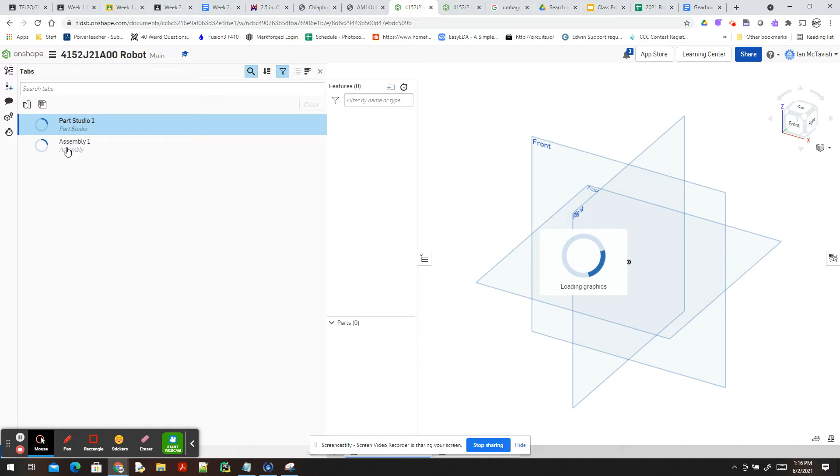So the key thing with this is we're going to bring that drivetrain in. I'll just wait for a moment. The only thing that should be in this robot file is one assembly, and that's going to be the complete robot. So I'm going to insert other documents, and there's the drivetrain. So I'm going to insert that.

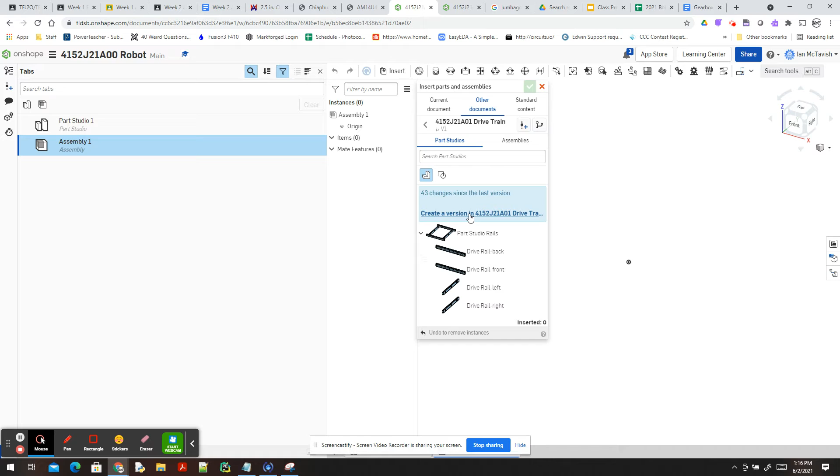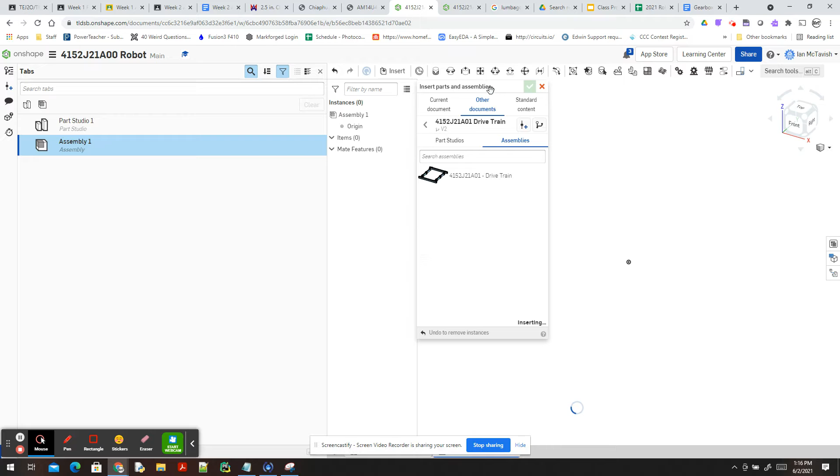And I'm going to create a version right now. We had a version before, we'll see if anybody's made any changes, but the benefit of the versioning system is that we can bring in the drivetrain, and if somebody makes a change to it, we are using this version, so we don't make any changes until we upgrade the version.

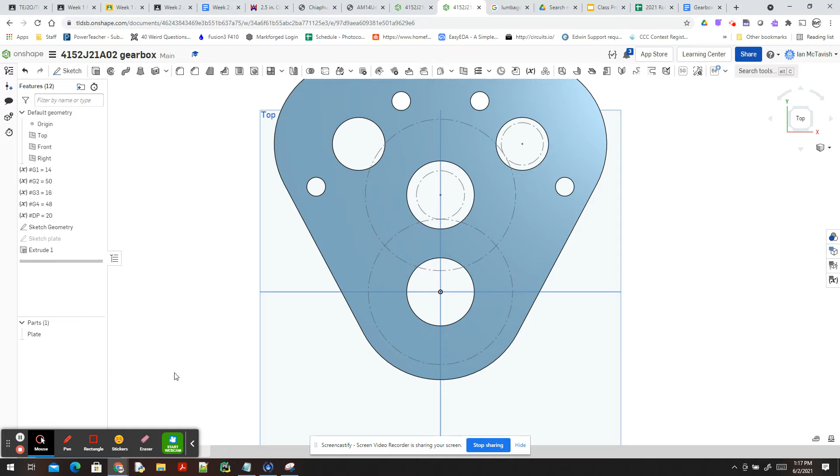So that is in position. We're good to go. I am going to fix the very first piece in here in position, so everything's locked in place. So there we go. We're ready to go. Now our gearbox, what we need to do is we need to create an assembly to begin with, and this will be our completed gearbox.

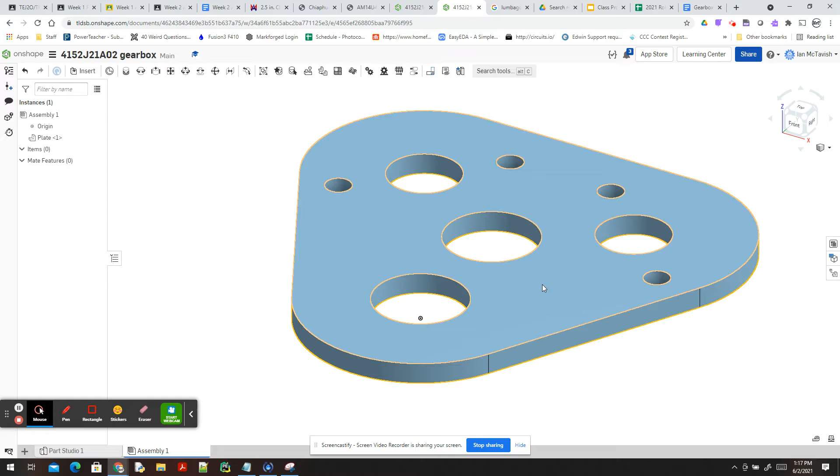Right now we only have the gearbox in there because we're going to figure out the mounting. So I'm just going to insert that. So there's the plate. And we'll just fix that in place, and we will be designing our gearbox based around this.

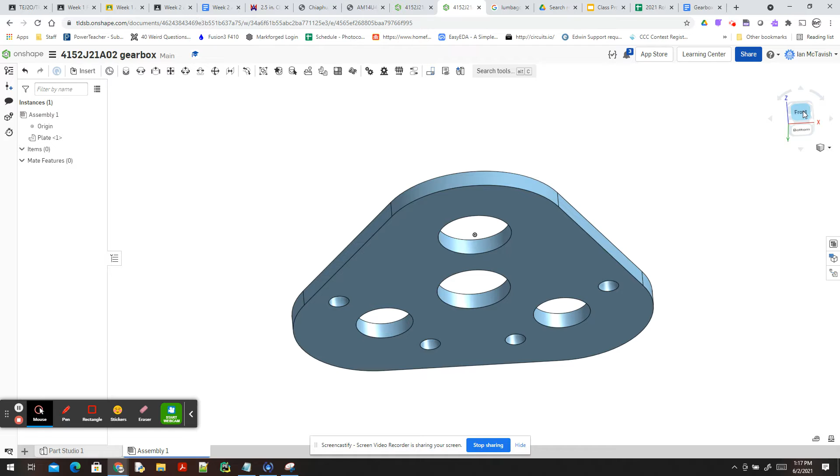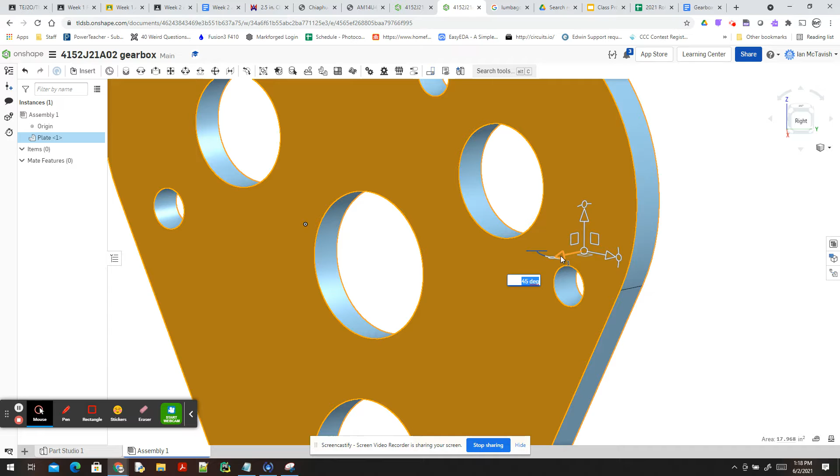Actually I'm just going to unfix it, and what I'm looking at is the bottom. Let's turn to the right. So what we'll do is we are actually going to rotate this, rotate it 90 degrees. And then let's rotate it this way, 90 degrees. Not 45, 90. And there we go. So everything's positioned.

That's great. And we'll just fix it in place there. So we're going to add our full gearbox to this, but what we'll do is we'll just create a version.

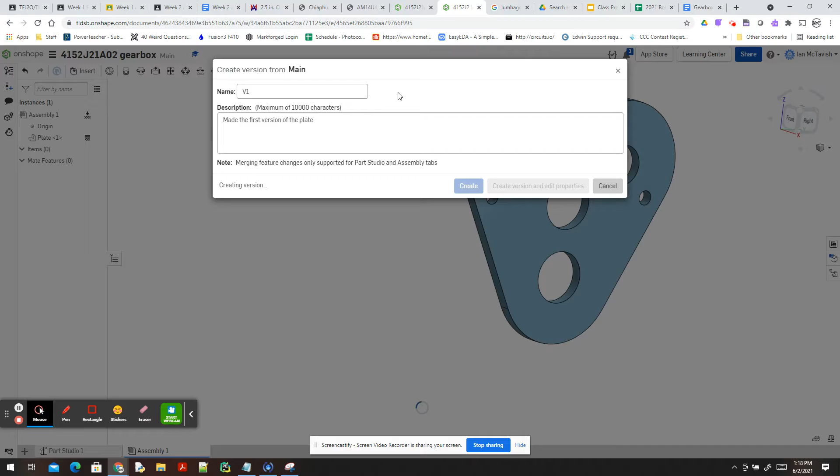I'll make the first version of the plate. We're going to create this, and there we go. So what we will do is we'll go back to here, and now we can insert that document.

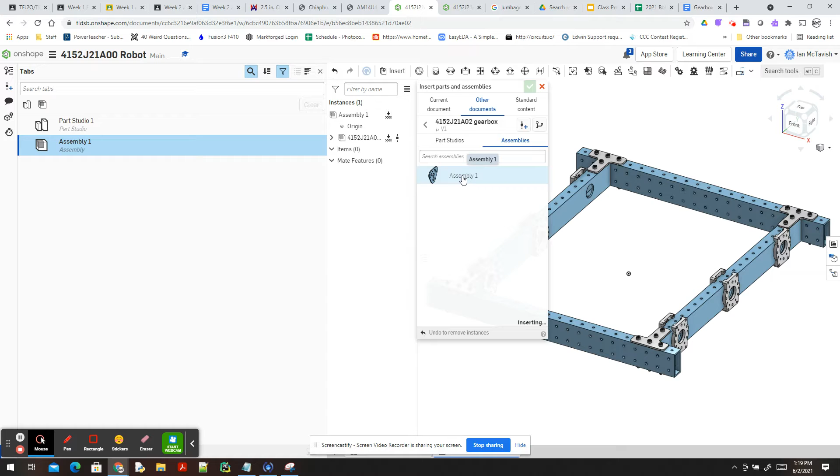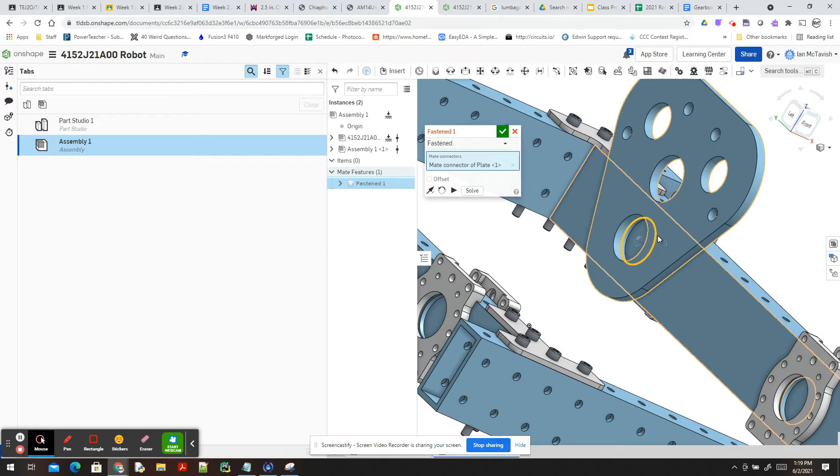And there's our gearbox, and we're going to insert the assembly. So there's our gearbox. And what we'll do here is we are going to fasten this. So we're going to pick this circle right there, and we're going to fasten it to that circle right there. And there we go, so there's our gearbox.

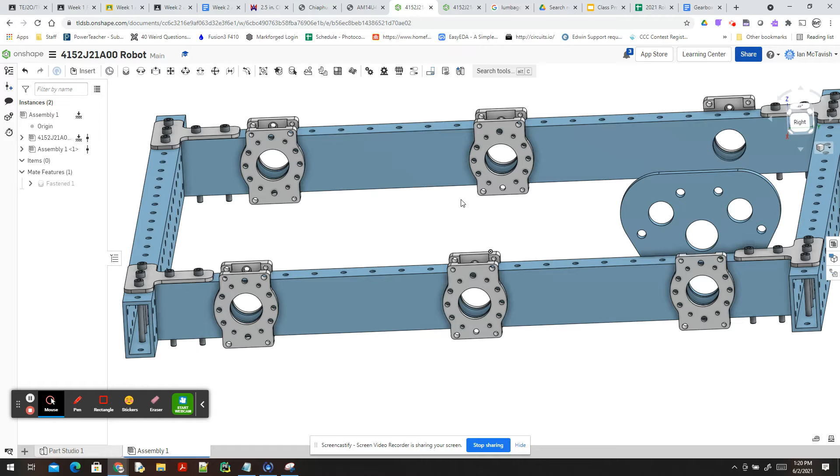It's mounted there. And now we need to make some changes because we need to figure out how to mount this to here. So there's a couple different options, let's just go over the options. The first thing is that we're going to right click, and we are going to edit in context, and that will bring us back into our other document.

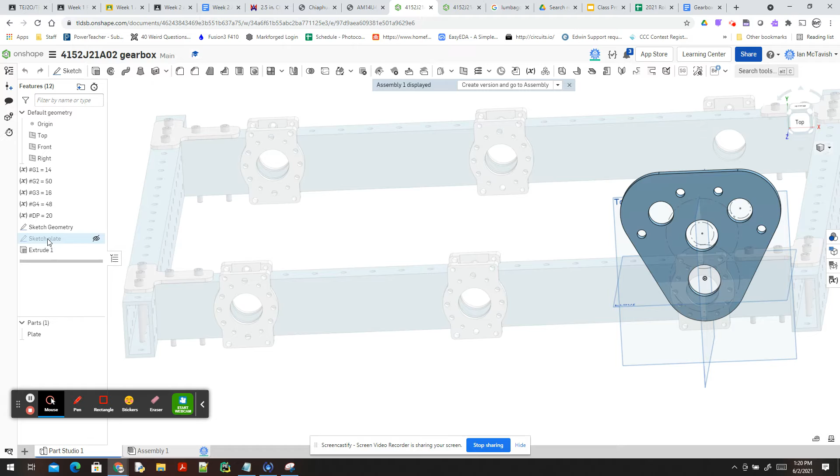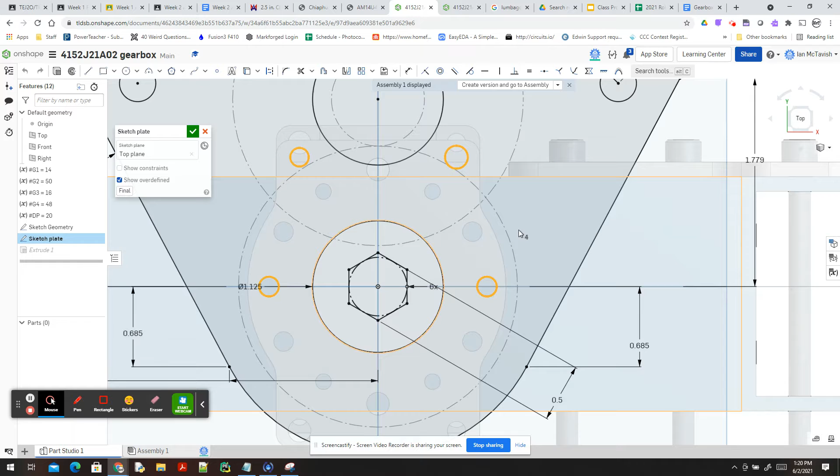But we can see where everything is. And so let's go into our sketch plate. And the bonus is that we can just go in here and we can choose to use the circles that are already built right into this bearing block. And we'll pick the top. And so we are going to use those circles.

Now, I'm a little concerned because these circles will probably interfere with the motor. So we're going to need another set of circles. So I'm just going to create a line, and this line is going to be 4 inches. And the only reason I'm picking 4 inches is we've done this in other parts, and that way I can be consistent. I can use the same thing on something else.

So the midpoint is going to get the midpoint there. And this looks good, so I'm going to add a circle right here. And this is my 13/64 for number 10-32. And I'll add another one right there, and these are going to be equal.

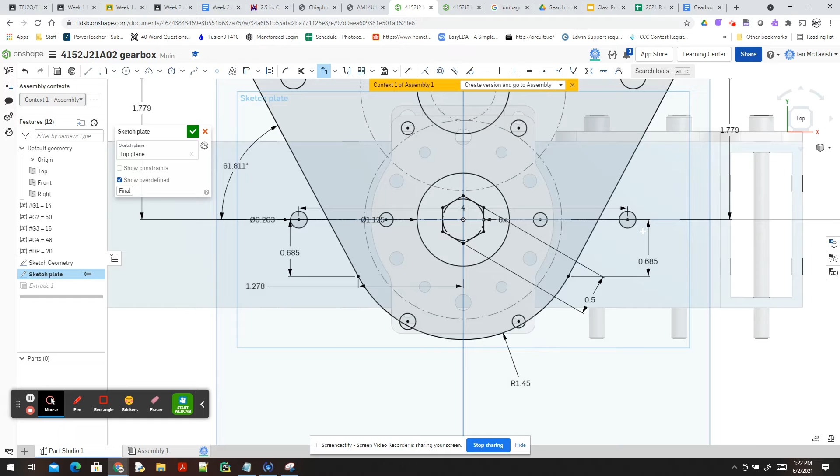I'm going to move over to the side and click it. So there's 1/4 of an inch over there, there's 1/4 of an inch over here.

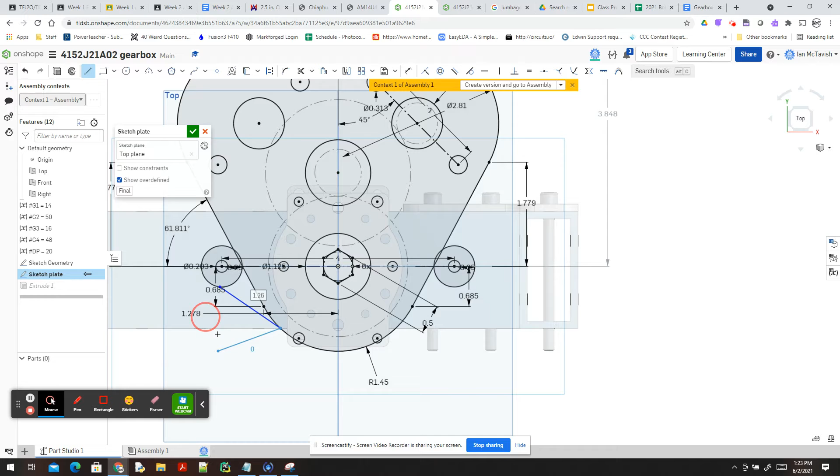And what I'm going to do is my same idea of just some lines here to connect these things. So L will turn on the line, L turns off the line, so it's quick and easy to do this. So I can click, and I'm going to click there, and then remember T for tangent. So now I can make the line and the circle tangent to each other, and this line and this circle tangent to each other. And that can lock things in. And because they're tangent, they're going to be pleasing to the eye.

So just adding lines over here, same thing. Now, obviously, I'm going to have a little bit of... oops. So those lines will be tangent with each other. I'm going to have some cleanup to do in here, so let's just get that done.

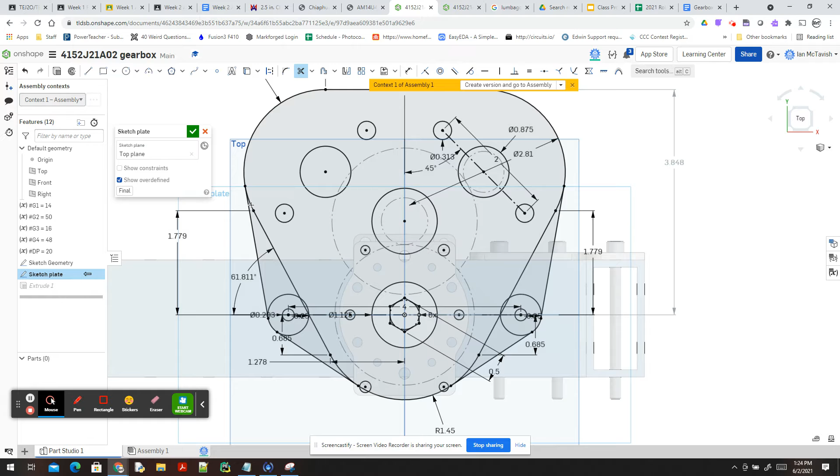So again, my trim tool, very handy, so I can cut these extra lines out so that Onshape will be able to easily figure out what is a hole and what is not a hole.

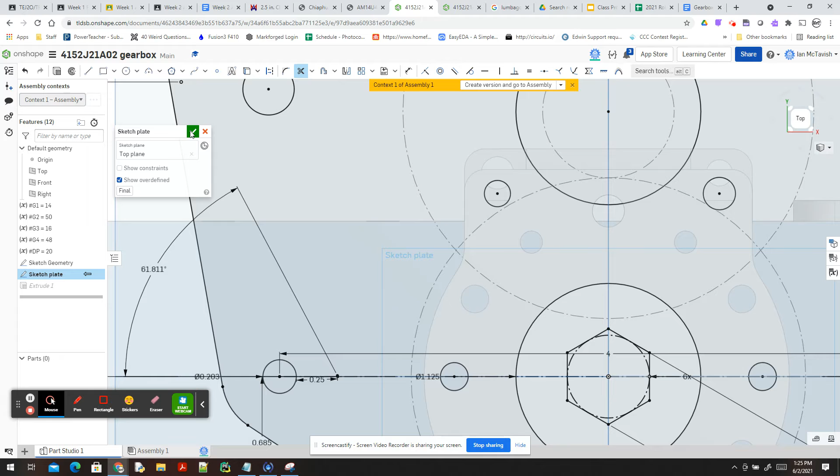If I didn't do that and I extruded it, I'd get a weird funky thing going on. I might just show you. So if I just save this right now, you can see with the extrude, it works okay over here, but not working terribly well over here. I do have to fix that up, and that's the funky thing I was talking about.

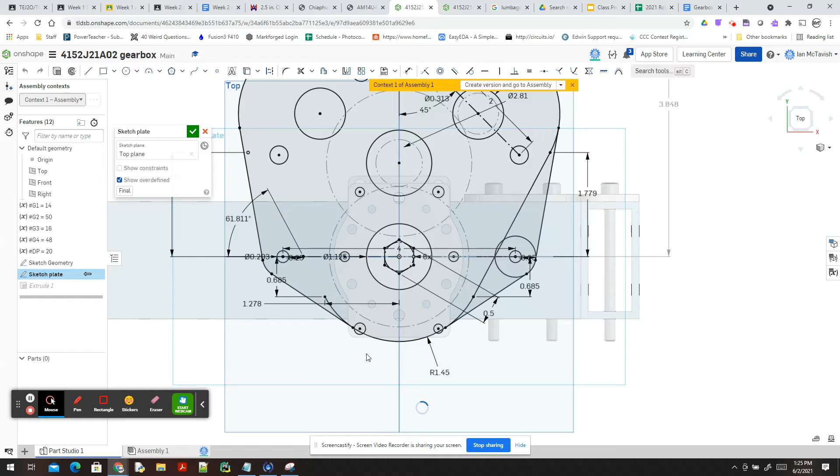So let's go back in here. And I just realized I've added these circles, but I didn't offset them, so I'll need to fix that up while I'm at it.

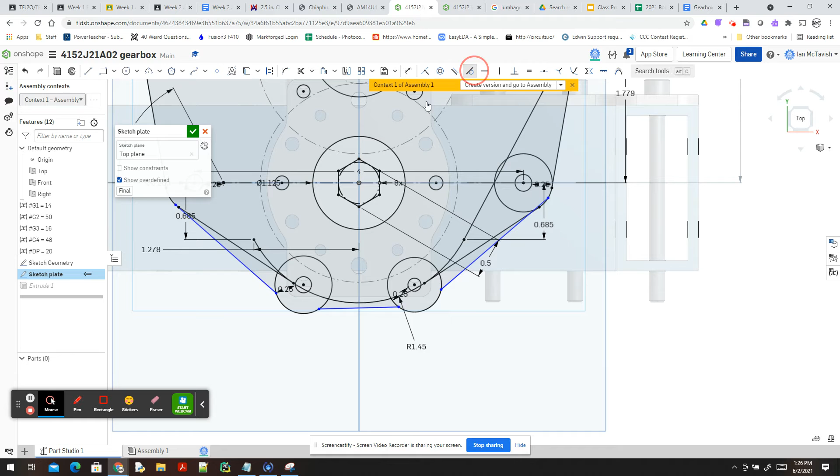And again, there's my line tool to connect these things. So now to make everything tangent, by making everything tangent, it's just going to smoothly flow into each other.

And again, I'm just going to trim out all of this unnecessary stuff so that Onshape doesn't go, wait, do you want a hole here? This little stuff here would just make a mess of it.

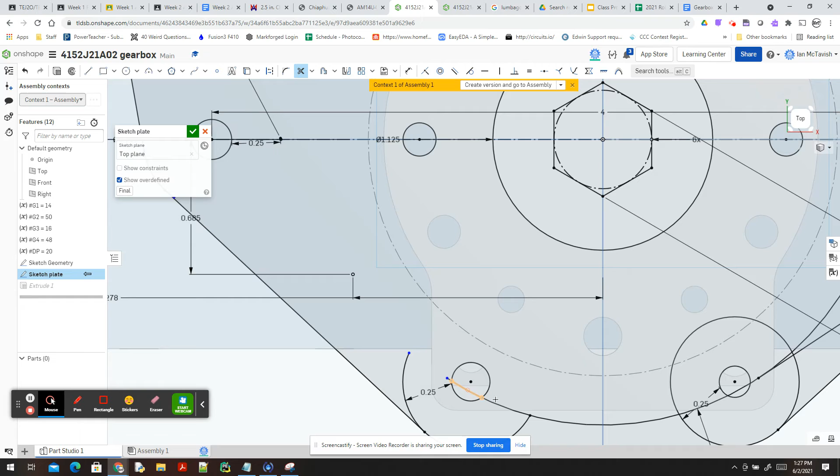And I'll probably break some of my things now because they're relying on measurements for other things that I've just cut out. So I will need to adjust some of these things.

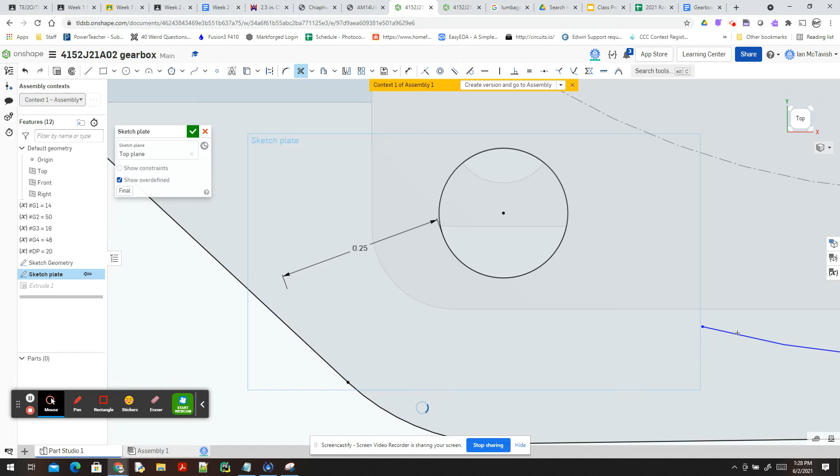The biggest thing is you get a handle, you get an idea of how to do it when you got to remember everything needs to have a starting and ending point. It's got to know where it's positioned in space. As long as you do that, you can set dimensions to control these things and get things positioned where you want them.

So a bit of work to deselect these things, but I find it, if you're methodical with it, it works well, just one thing at a time. If you make a mistake, you want to undo it.

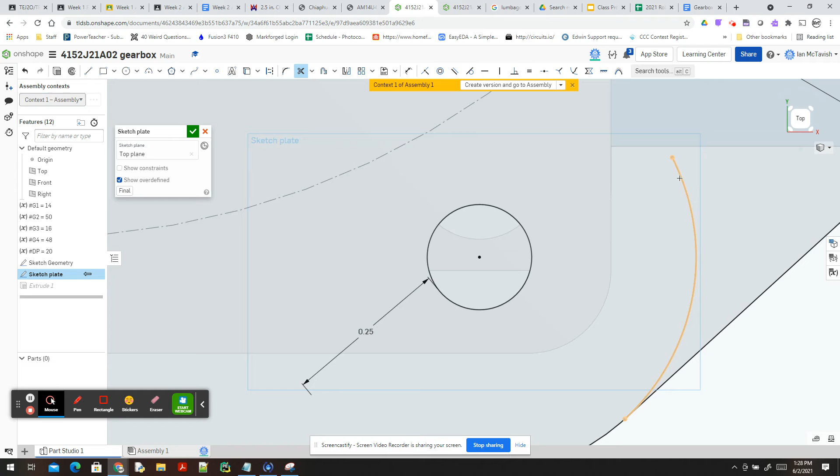But it makes it so much easier because the extruding is just seamless then, and you're not searching for why is this little sliver sticking out and stuff. You can quickly identify those things and fix them.

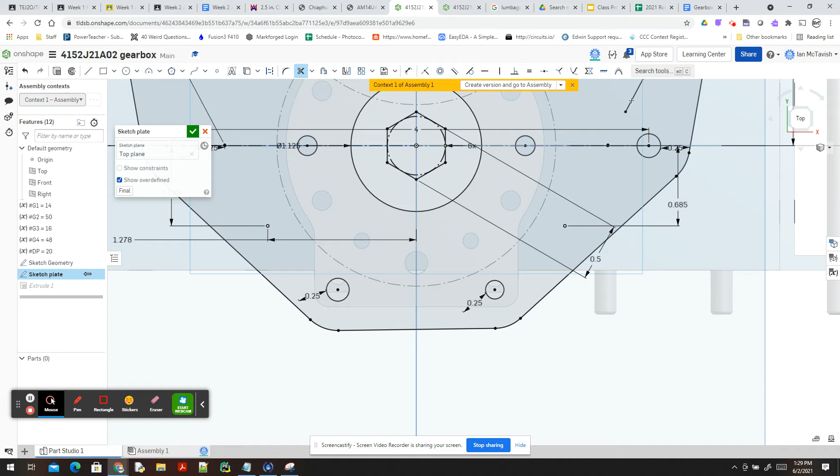And I think I'm pretty close to done. So there's only a few blue spots there, and these blue spots are basically endpoints and radius and stuff like that. So just setting some dimensions for them can lock them in place, which is what you want.

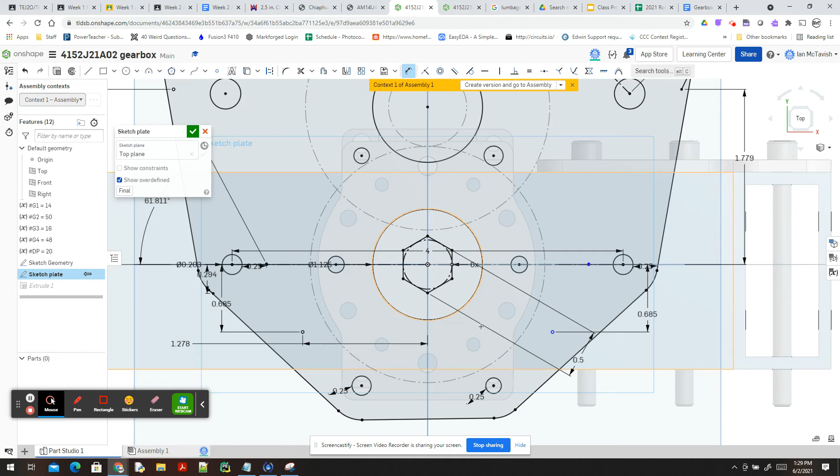And once they're locked in place, everything is fully constrained. And there is my gear plate, and I can create a version here.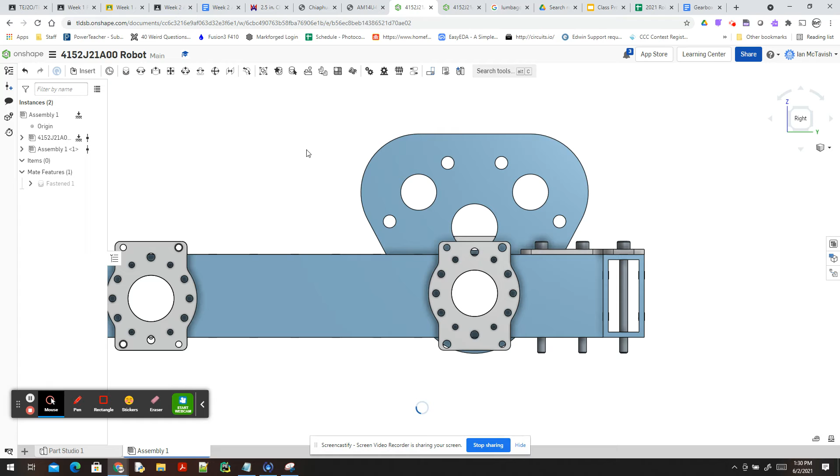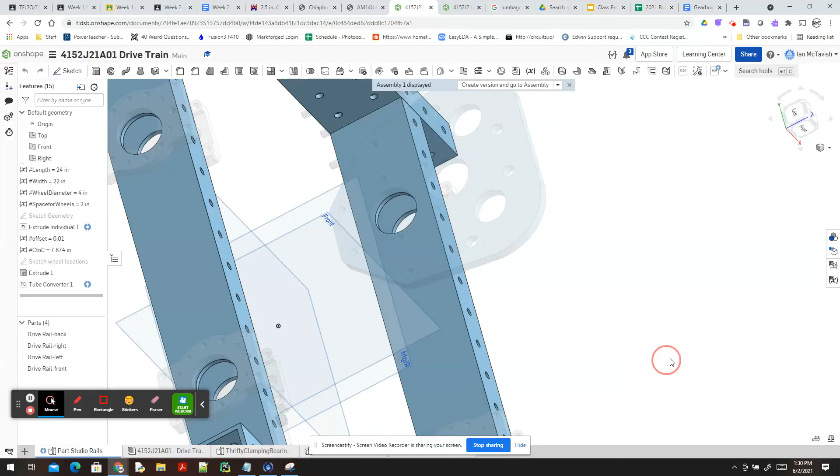And now in my main robot, you can see it's updated, so my new version is there. And what I can do is I can now go into this piece, and just create a sketch on here.

And where I have these holes, oops, undo. So right click and select other, that's going to make it much easier. And I'm looking for the edge so that I get the right part. Just takes a little bit of time.

I got a few things running in the background which are just bogging down my computer. But for...

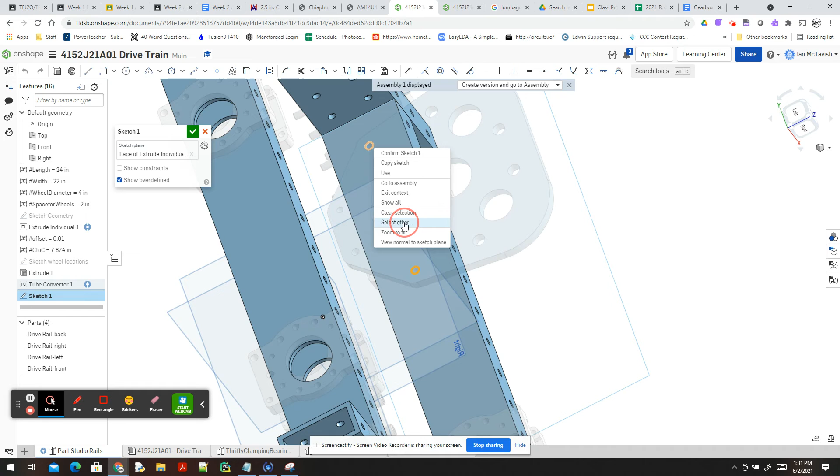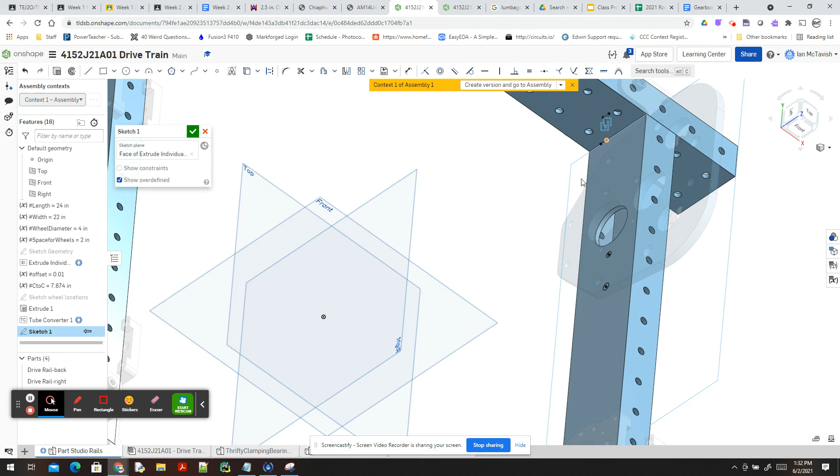And use those. And I should see. Okay, I've obviously... those were not what I had in mind, so I somehow picked the wrong thing there.

Let's see if I can select. Okay, that one worked, and that one, yeah, I selected the wrong thing, so I'll just...

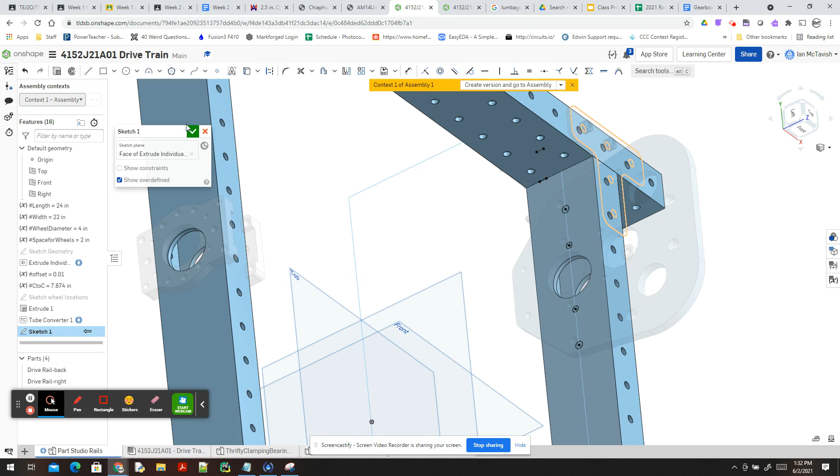Those are just two-dimensional lines, so it really shouldn't matter if I delete them or not, so that should be good. Okay, so now that I've got my sketch in place, what I'm going to do is extrude and remove, and it's going to be through all.

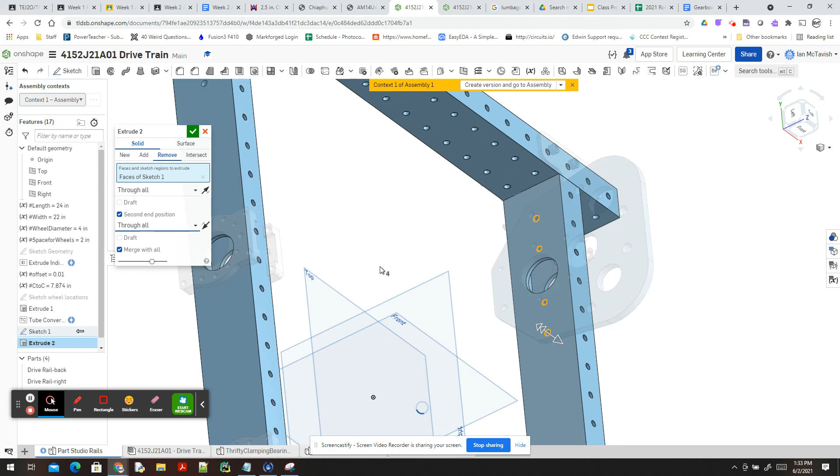And sketch one, through all, second end position, change that to through all as well. And now I've got my holes where I need them.

I would obviously... one thing that I would do is go back into the sketch, and I'm just going to mirror these things so that way I've got the holes.

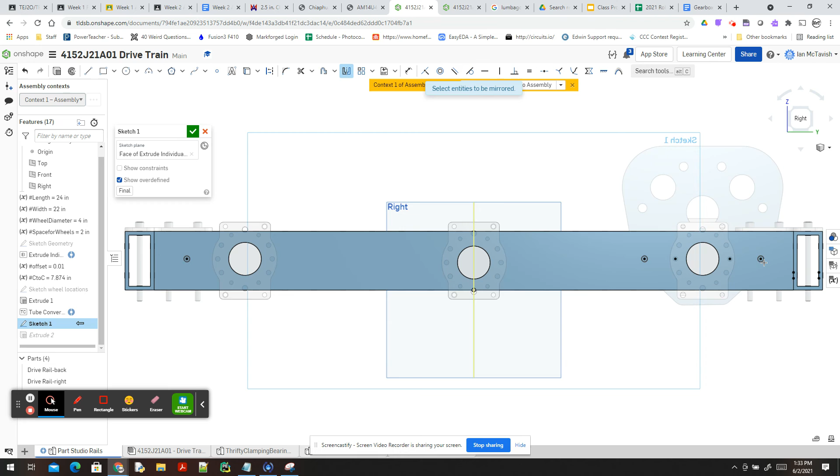If I decided to change which one I'm going to use, I've got all 4 holes there. That's much better. Not sure why this one's not showing up. There we go. So that makes a world of difference.

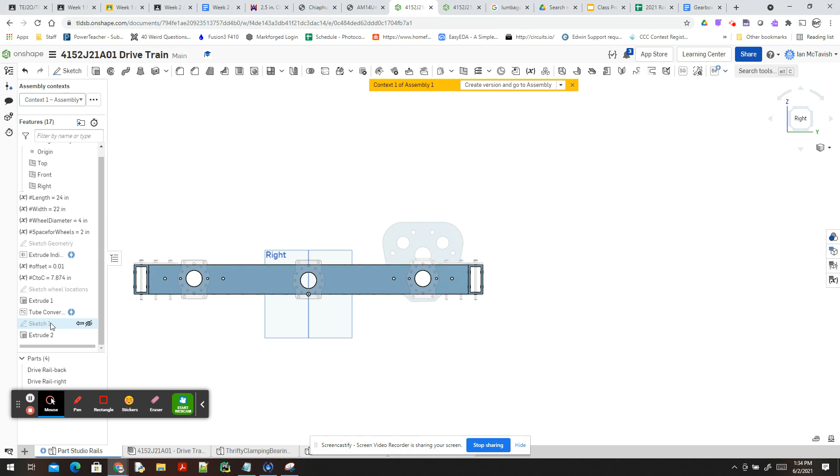And again, let's go into the sketch, because maybe I want to change the gearbox and put it right in the middle. So let's use those. And we'll use this circle.

And we will use it, but what we will do is we will make sure that we are selecting, making that a construction line. It doesn't really matter because we're carving a hole where it is, but I can now create another line, set that line to be 4 inches, set it to be midpoint on that point, and again, two circles, equal sign, to set the size based on these other circles.

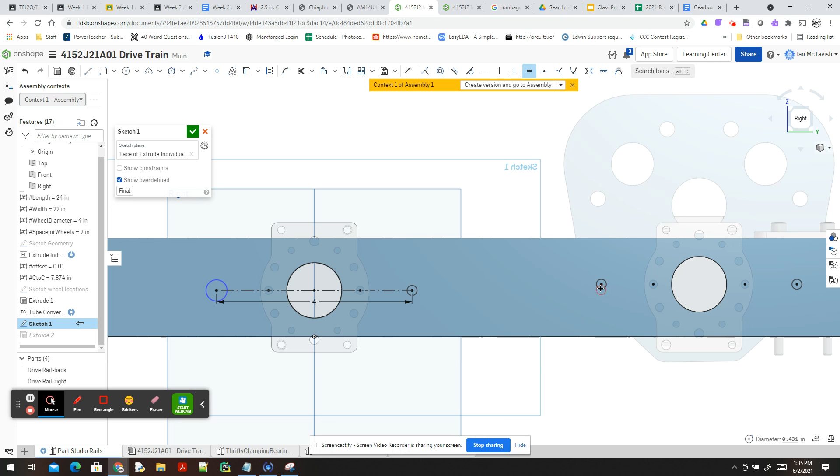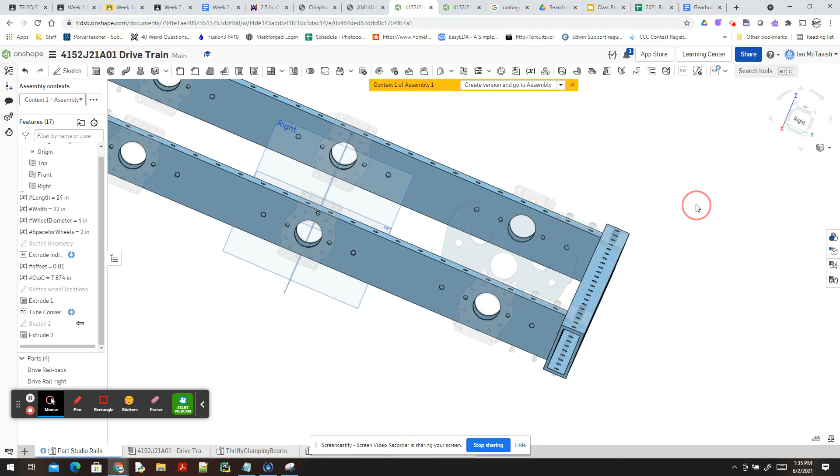And this is really key. I'm not going to use this, but if I decide to revamp this robot next year and move the gearbox plate, I have that flexibility. I can move the gearbox plate to any of those three positions now, and the holes are all set up ready to go. So I'm going to create a version.

And that brings me back to my main robot, and you can see my updated side rails are in there. I can see the holes, everything lines up beautifully, and I'm all set to be able to start building this gearbox. And this plate will be the inner plate.

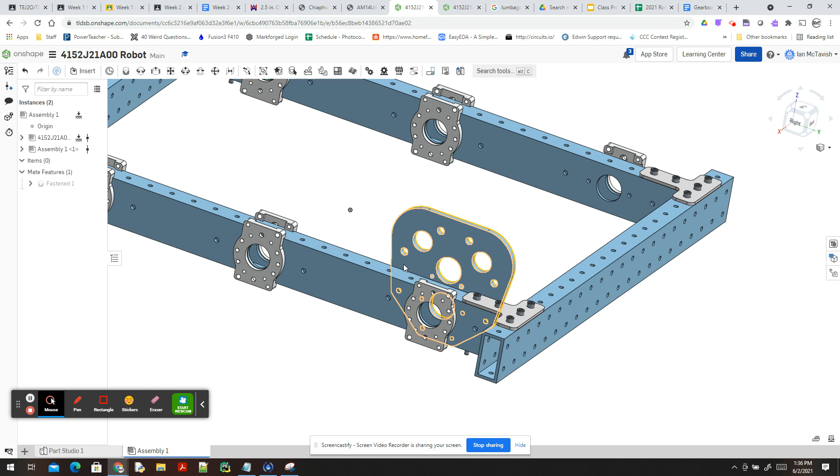We'll have the gears right there, then we'll have the outer plate, and my goal is to have a motor here, and on this one the motor over here, and the reason is so that I've got spacing to be able to mount things. It's got some ideas that I think are going to work quite well. So that's how to design the gearbox plate, and there's more to it, but that's for another video.